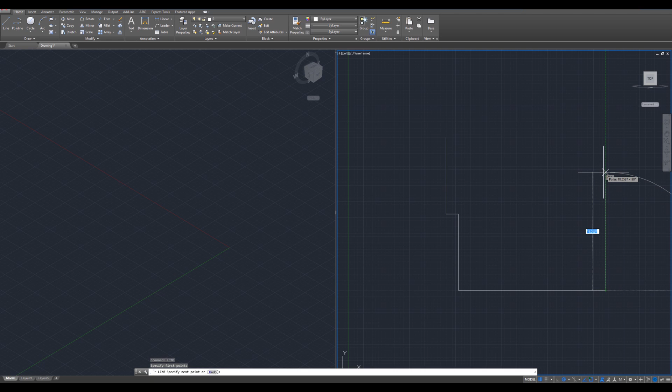On the back side, draw a vertical line 24 feet, enter. Then draw a line anywhere in the center, since we'll move it into place later, but this line needs to be 36 feet vertical. Type in 36 and press enter.

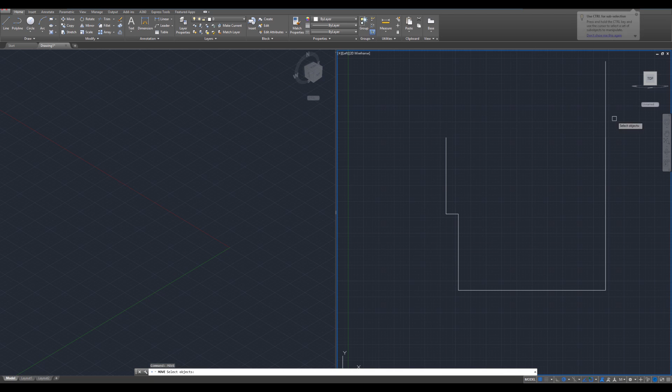Use the move tool, M-O-V-E, enter, select the line, enter. Click on the bottom portion, move it to the wall, enter, then press move again, enter, select the line, enter, click on the point and move it to the center. The center is at 13 feet, so type in 13, press enter, and if done correctly it should be centered with the rest of the structure.

Now we're going to draw a line connecting the portions of our roof to the sides of the walls. Once done, you don't really need that center line anymore. Let's adjust this view just a little, then select the center line and delete it.

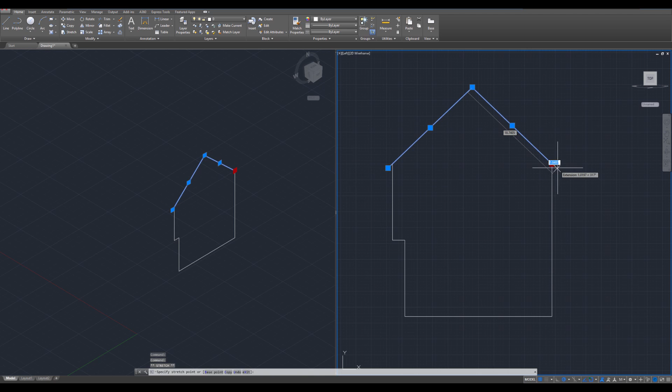Now our roof needs a little bit of an overhang, about a foot. We're going to take each of those lines, click at the end point, and type in 1. Click on a point, move it out a little further, type in 1, press enter, and that gives it that 1 foot overhang.

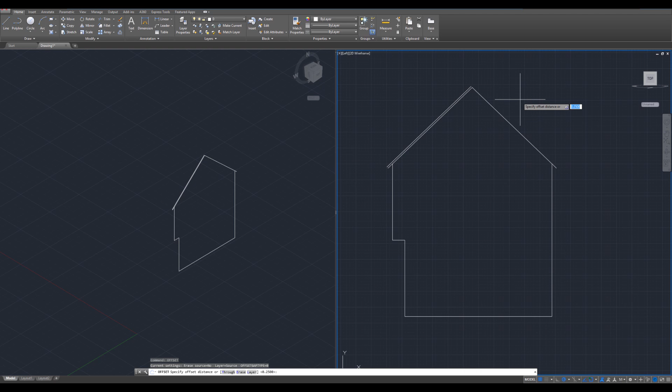Now the roof needs a little bit of thickness, so let's use the offset tool, enter, and give it about 3 inches of thickness. Type in 3 divided by 12, enter, then select the line, move upward, click, and it should save that. Do the same thing with the other line: offset, 3 divided by 12, move it up, then press enter.

Zoom in to the top, we've got to connect some things. Click on the end point and hover to the one that's already located so you get that green dashed line, and connect it, then connect those together. At the top portion we do the same trick: click on the top one, click on the blue point, move it to the bottom line, and that green construction line appears to help facilitate where the other line goes. Finally use the line tool to connect both portions together, like so.

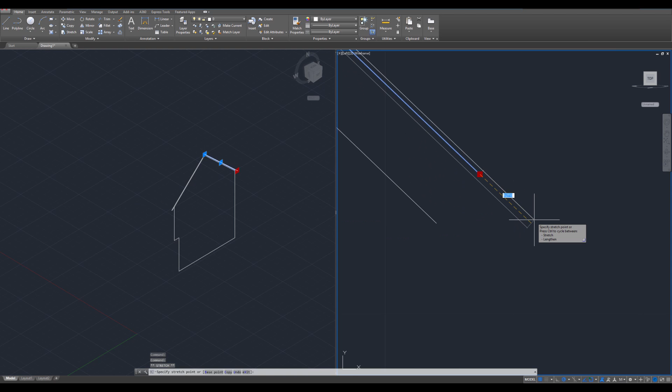Okay, one more time, but this time on the back. Using that same trick, get it connected, then connect it accordingly.

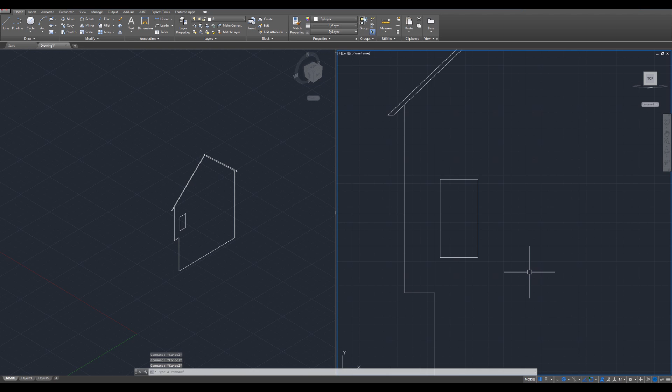Let's go ahead and draw in some windows. For the windows, we're just going to go with a traditional 3 by 5. Type in 3, then space or tab, then 5, and that's going to be the dimensions of the window.

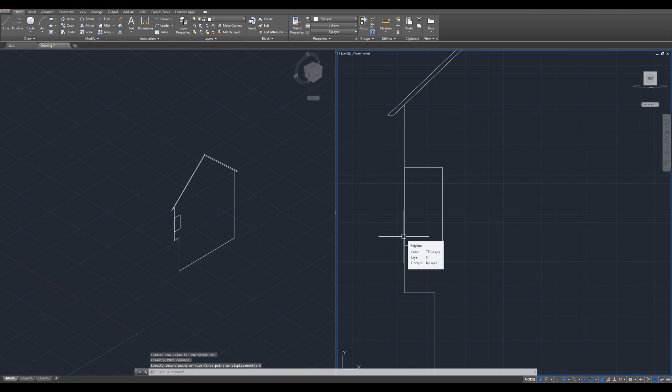Then use the move tool to move it to the center or corner of the upper floor of the Garrison style. Use the move tool again, enter, click on it, and move it up a total of 3 feet, so it's 3 feet from the ground, enter. Then move it one more time, but this time horizontally, a total of 3 feet as well. That's going to be the placement of our first window.

We're going to copy that, select it, enter, click on the corner, and move that an additional 7 feet. Type 7, press enter, and that's the placement of our second window.

Okay, we're going to put a small window on the top, so if you had an attic or something this would be feasible. For now let's try a 3 by 3. Type in 3, tab, 3, enter, and that's our upper window. Now we probably have to make it a little bigger, so I'm going to add 1 foot by grabbing the end, typing 1, and pressing enter.

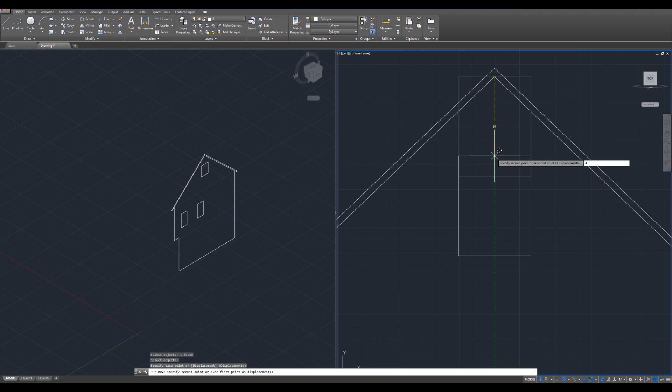That looks better. Then we use the move tool to select that, click on the center, move it to the top interior of the roof, and use the move tool again to move it down approximately 3 feet or so. Okay, that's looking pretty good.

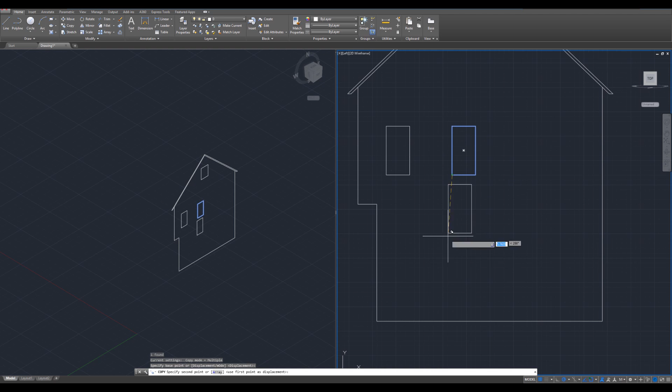Lastly, let's go ahead and copy the two windows we've already made and add them onto our first floor, so it promotes the unity of the structure. I'm going to select that one with the copy tool, grab it, move it down, then use the move tool to select it and move it up 3 feet so it's symmetrical with the top one.

Then I'm going to use the copy tool one last time, select that, click at the end, and move it 7 feet. Okay, and I'll see you for part 2.